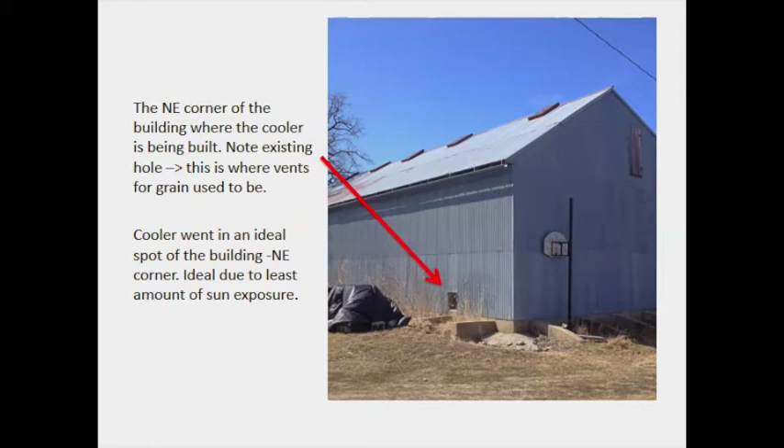Rich loves this. He came out and saw it. The northeast corner of the building is perfect. It's the least amount of direct sun, so we're already being smart about location. The building is about 40 feet deep. I have an 8-foot cooler, so there's 30 feet of usable space in front of it. So it's quite well protected from direct sun.

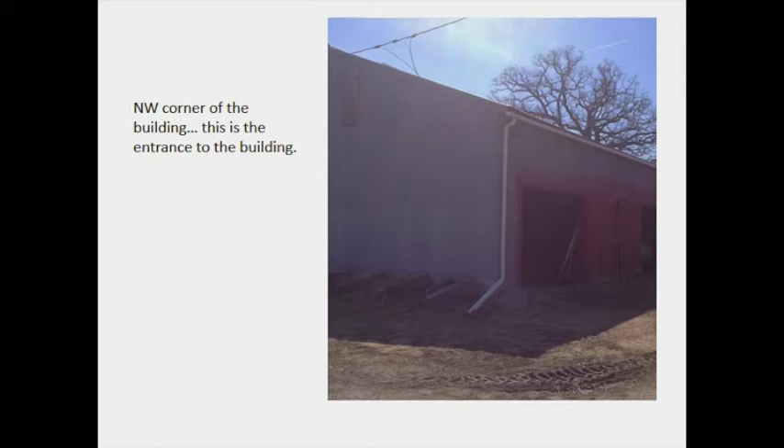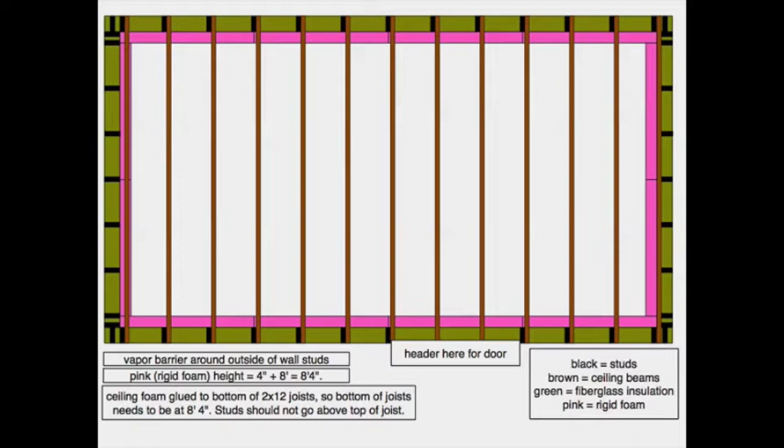So you have a plan and you have what actually happens. It's important to know, if you're thinking about doing this on your own, that's the mentality I come from. There's a plan, and then you're going to have to adapt. I ended up going back to Menards about 62 times over 10 days to get whatever I forgot.

More practical pictures. I wanted to be able to put pallets of heavy things on top. Because I had salvaged 2x12s about 12 or 14 foot long, I knew I could use those as joists on top. So I went with 2x6s for walls to give those joists support. I'm on cement, so I wanted to use green treated lumber.

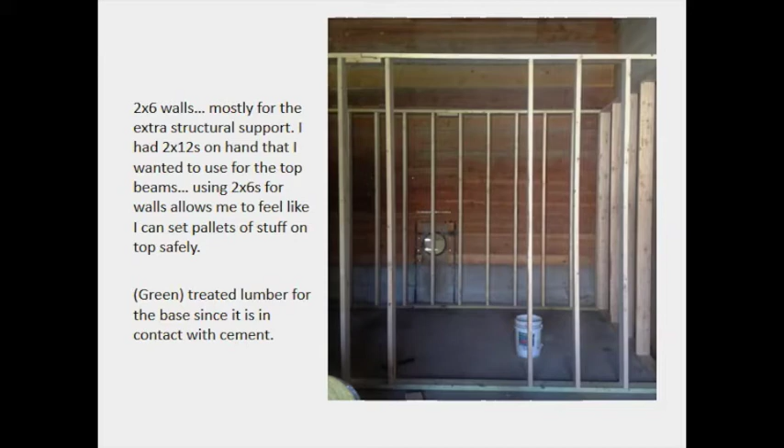We've had termite damage in parts of this building before, another good reason to use green treated lumber. From a food safety standpoint, that lumber is far away from my food, so contamination isn't a concern. I'll show you a few more pictures. I built new stud walls inside my existing structure, so I'm not using any existing walls, partly for support, partly for convenience, partly just because.

When I was putting those joists in, I was very conscientious about having a smooth surface on the inside because that's where I was going to mount the rigid foam. A lot of times when you do construction, you're more concerned with the outside being square and you'll make it up on the inside. These 2x4s are just temporary supports when I was setting those joists on top.

Really do ask questions. I always talk too fast and don't give people enough time to look at pictures, so feel free to interrupt.

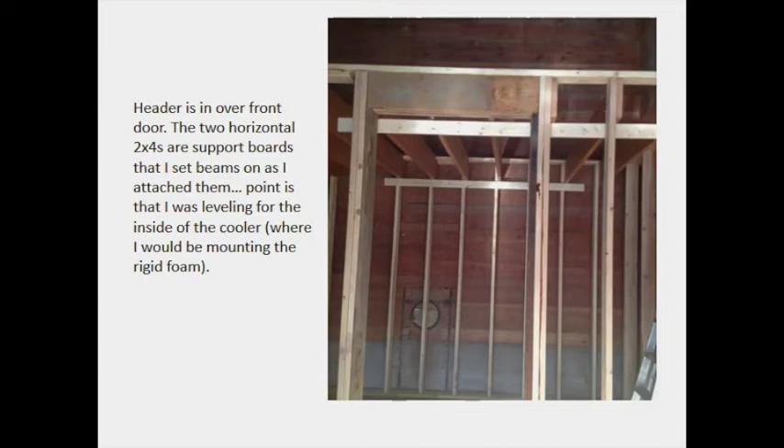I should probably say a little bit about the insulation that I used. I knew I wanted 4-inch rigid foam on the inside, and I knew that I was going to have 2x6 walls that I wasn't going to put foam into, so there was an opportunity to use some extra fiberglass insulation to add even higher R values. So I did that, and I also knew that fiberglass insulation, because of the temperature difference, could have potential problems with moisture. So here we're putting Tyvek house wrap moisture barrier up around the outside of the cooler.

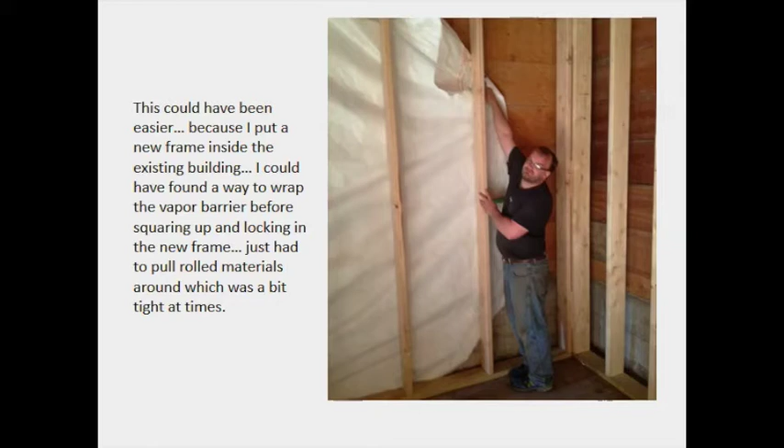Sorry, I don't remember what I've got coming for slides. There's insulation. So this is the ceiling. The camera's kind of pointed up at the corner. These are the walls. So the Tyvek is around the outside, and I'm starting then to put up rolled insulation.

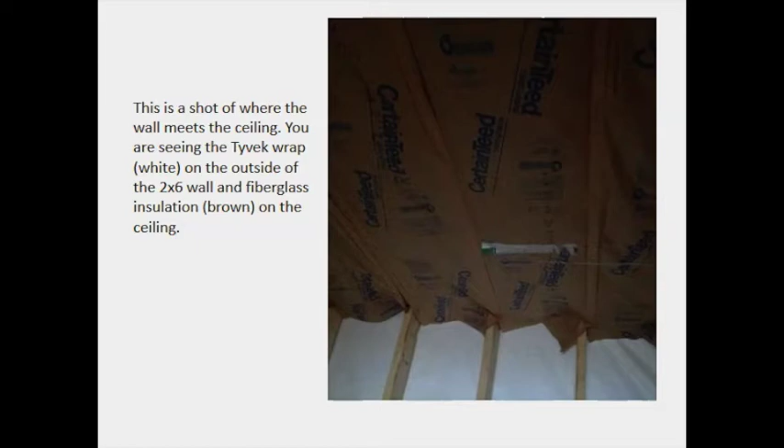There again, corner shot. So now here are the walls. Again, they've got, I think it's R13 or R11 insulation there. Some spray foam in the gaps in that corner, and then the 4-inch rigid foam is going over the inside of this. The 4-inch rigid foam is R20, so I ended up being about 33 for an R value, which is high. I think it's pretty good.

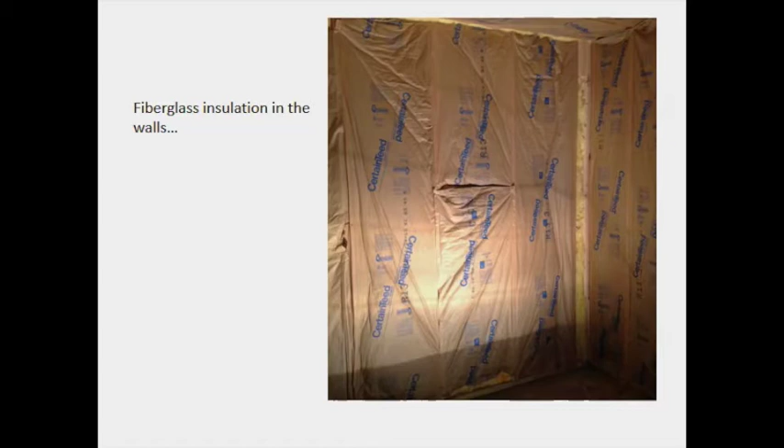I don't know what commercial coolers even are. Any idea what a commercial? It can be up to 6 inches of foam, I know of. Well, that's about what I'm competing with then.

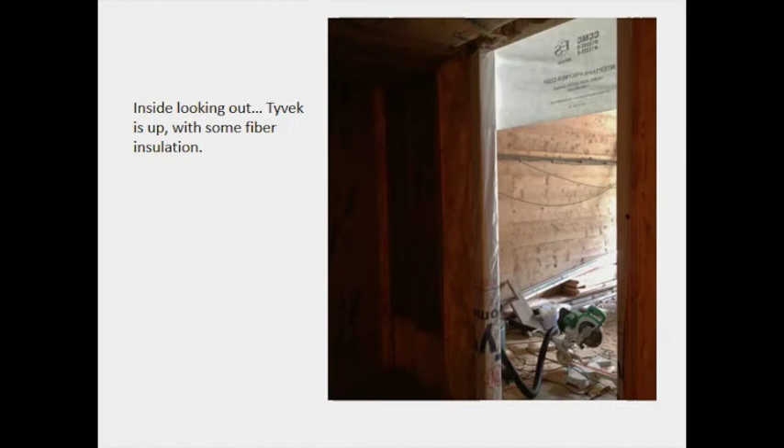Some of the practical things. This is the doorway, so you're inside the cooler looking out now. You just see some of the Tyvek. It's not a very good picture, actually. This 4-inch rigid foam, again, 4 inches is pretty thick. It comes in 4x8 sheets, and it's not very cheap. That was half of the budget that I spent.

Being the kind of guy that tries things out, and if I don't like it, I'll revamp it at some point, I didn't want to glue the 4-inch foam to the studs, because I wanted to have some flexibility with it. So I ended up putting maybe 4 or 5 fender washers in a sheet, figuring that if I ever had to deconstruct, it would be relatively easy to take those off, plug the holes and reuse the foam.

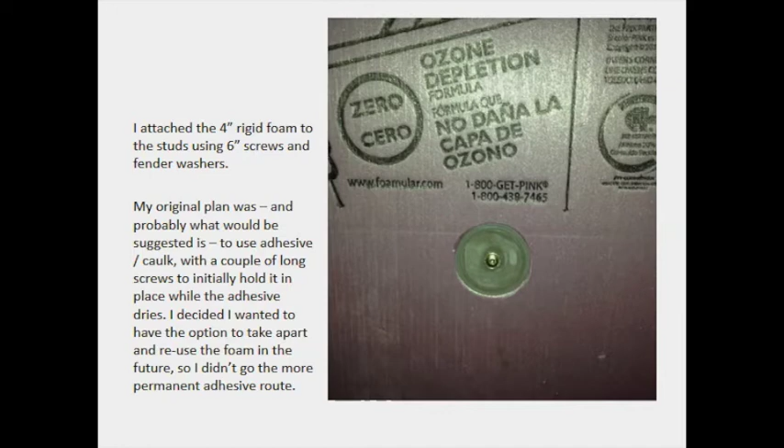Where'd you get the 4-inch foam? Menards. It is a special order to get 4-inch foam. You have to order, I think it was 24 sheets. I needed 22, so I do have a couple extra sheets. I think they're about $50 a sheet, so there's a couple extra sheets sitting around I'm saving for a rainy day. Thought sometime I might try building a cooler for the back of my pickup to take to the farmer's market, but I haven't gone that far yet.

And just my slightly sloppy carpentry, so you start out with a perfect plan and then, oops, I didn't think about that until I started piecing things together. So I ended up having an 8-inch gap down the middle of the ceiling, so I filled that with one of those extra pieces and some spray foam.

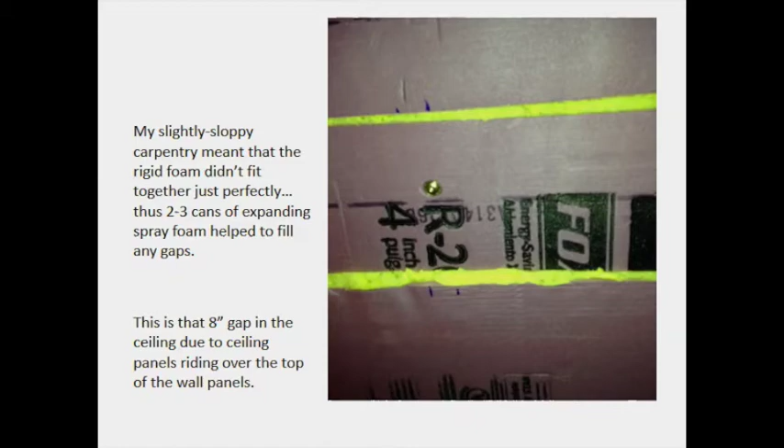My door solution, this is one of the things I didn't really figure out until the very end, but I'm quite happy with how it turned out. It's an insulated exterior door that came framed. Found that for $20 at an auction. Then I took some more of those fender washers and attached a full piece of foam to the back of it. I think I had to cut off 2 or 3 inches for clearance. I'll show you the next slide in a second. But I did have to cut out a handle for the door from the inside. So that's probably the weakest or leakiest spot in terms of conduction of energy through the door handle.

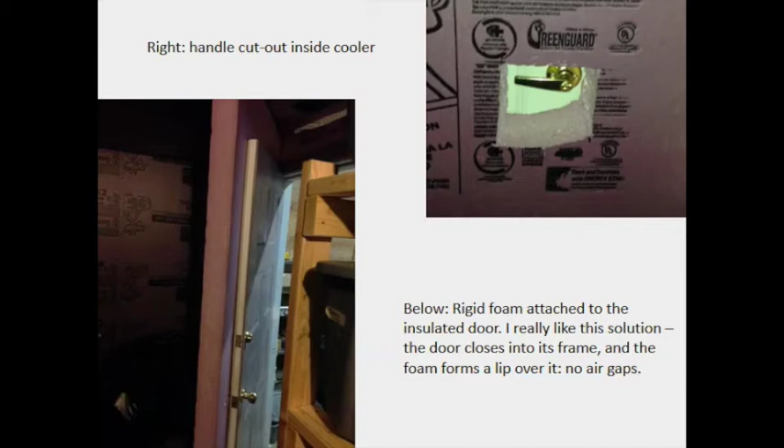Notice there is this lip here. The next picture is going to show better, but this is the door jamb where the door is closing. I don't know how to illustrate it in a good way. Basically, there's a lip, and I really like that lip because it prevents any air from flowing directly out of the cooler. It's either got to go around the foam and then through the door. So, innovative solution that I like.

Doing the door that way, of course, I realized when I was trying to open the door, there would have to be a gap in the foam so that when that foam sheet opens. There's probably a better solution for this; I haven't figured out what it is. So there is that bit of a gap there. Again, there's R13 insulation behind it, so it's still fairly tight, but maybe that could be improved.

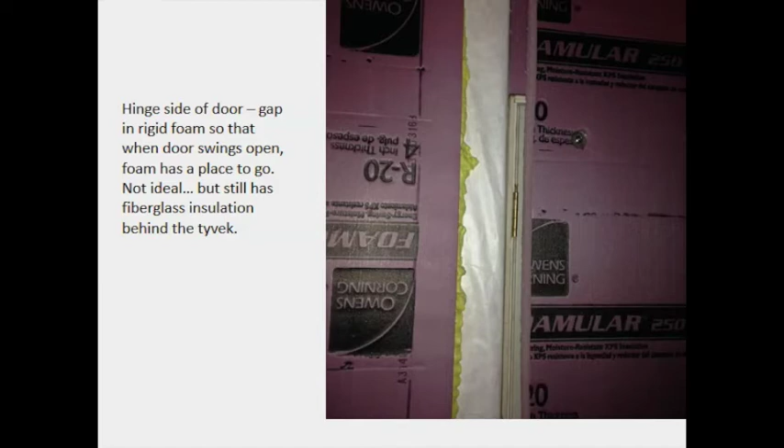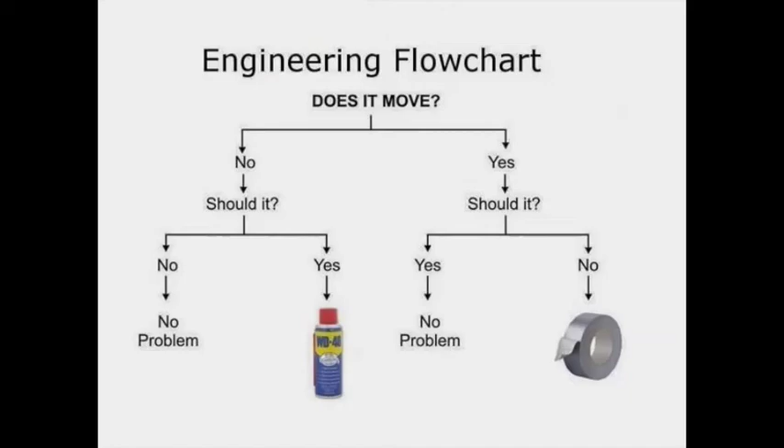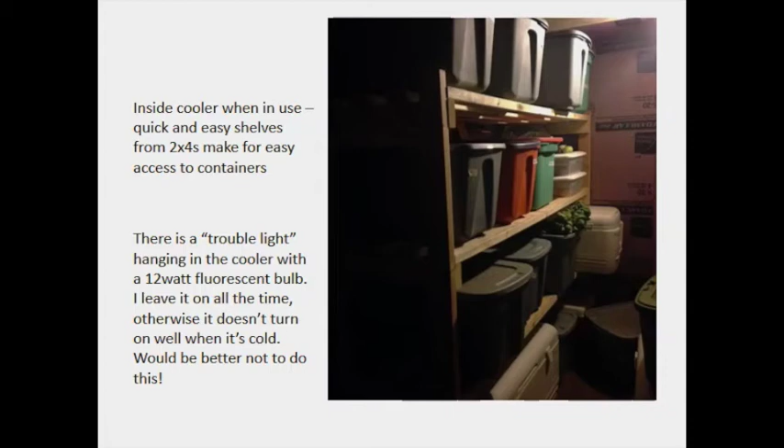Back inside the cooler. So this is what it looks like mid-season. I've got containers and coolers, and there's some Brussels sprouts sticking out there that didn't get covered. But a lot of people ask, what do you use for light inside? So I've just got a trouble light, mechanics light, that kind of thing, with a 12-watt fluorescent light on it. Don't tell Rich, but I leave it on all the time because it's connected back behind. It's just hard to turn on and off. And that was enough light for me to work in it to get what I needed to get. Yep.

Did I insulate the floor? Yes. So concrete floor, not a good thing from a cooler standpoint. So I've got 4-inch rigid foam. This is one of the discussions Rich and I did have early on when I was starting to construct this: what is the compression of that foam? How much weight can I put on it? And I don't remember what it is. I think it's like 100 pounds a square inch.

I'm like, so if my brother, who's 50 pounds heavier than me, is carrying a full cooler of stuff and walks in with 1 foot, how many square inches are in his foot? And is he going to go through my foam or not? Turned out he wouldn't, so it was okay. And I did put 3/4 inch plywood down on top of the foam, which helps distribute that weight a little bit. Very important point, Rich will emphasize that. I think having that floor insulation is critical. So good question, thank you.

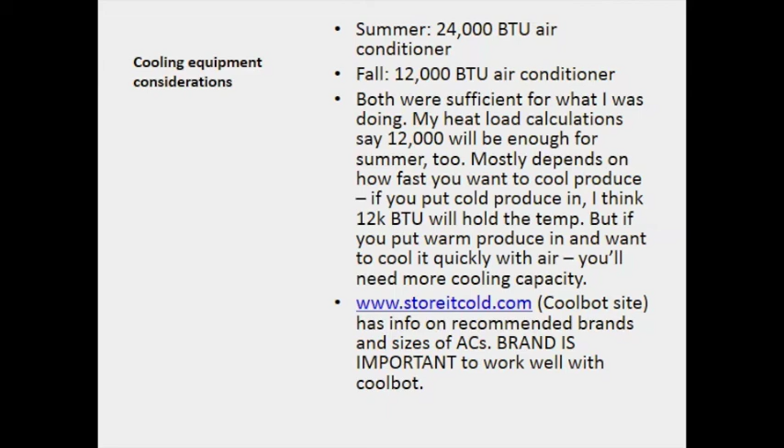So I was trying to think, if we're talking to an audience that's thinking about doing this, what things did I do that I would say you should do or I should do again? The location, being inside an existing structure, especially the northeast corner, is a great location. It's protected and not much sunlight. A trick for cutting straight in a 4-inch piece of rigid foam: I used a handsaw with 2x4s or 1x4s on top as the guide. Getting those straight edges, it's helpful to have butt joints so you don't have to fill so many holes. That worked well.

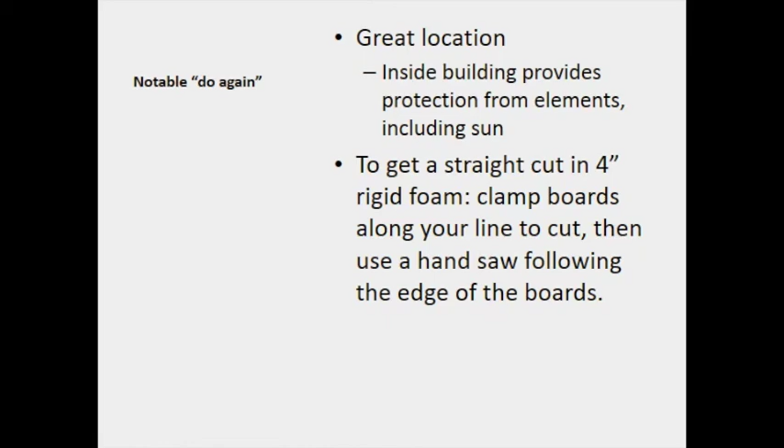Things that I could do better. You saw that 8-inch gap down the center that I had to fill in. I know there's a way to take 4x8 sheets and build a box where you don't have to have gaps, or you don't have to cut any sheets and make it work. I still haven't figured out how to do it. I know there's a way. So there's a puzzle for somebody. Maybe you guys in the front row would like that puzzle at some point.

Yep, Paul. Your door opens to the inside? Yes. How about the outside? I think my thought process was I might have big equipment out in front or packing tables. Also thinking about carrying containers in, I can push the door open with my knee if I've got something coming in from the field, so I don't have to set it down and open the door. I was just thinking of that gap that you have to leave for the door to be able to swing in, if you had it open to the outside.

Well, yeah, but then you couldn't do the lip on the inside. You'd have to do the lip on the outside, and then I think you'd have the same problem. Yeah, you're right. Well, then you have a smaller door. If you had a 36-inch door and your lip was 8 inches of it, you'd lose some of that carrying space. That's the thing. Maybe the thing to do is to build a bigger door, actually, if you think about carrying coolers and such into this.